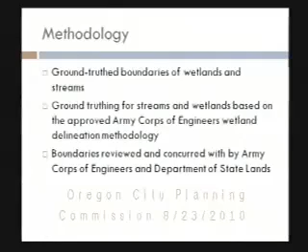The boundaries for wetlands, streams, and ponds were then flagged by wetland scientists in the field, and then surveyed by professional land surveyors to an accuracy of about one-tenth of a foot.

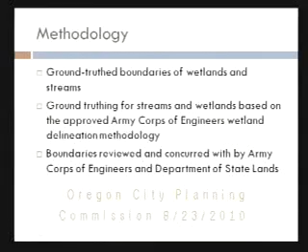We then prepared and submitted a wetland delineation to the Army Corps of Engineers and Department of State Lands, and we have since received jurisdictional determination and a letter of concurrence on the location of the wetland, stream, and pond boundaries from both agencies.

After the fieldwork was conducted, we applied Municipal Code 17-49-110, shown in this slide, to each wetland, stream, and pond to determine the width of each NROD buffer.

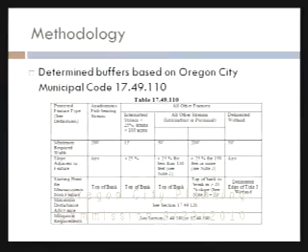It's my understanding that the city has taken a cost-effective, conservative approach to mapping all of the NROD boundaries throughout the entire city. As we were working with a relatively small area, we were able to refine the buffer locations based on the ground truthing fieldwork.

During the ground truthing fieldwork, we encountered several roadside runoff ditches within the project footprint that were created for the purposes of conveying stormwater during precipitation events. During our mapping process, we realized that these roadside runoff ditches had been provided NROD buffers in the city's mapping.

Oregon City Municipal Code 17-49-20 states that NROD protects, as one connected system, the habitats and associated functions of the streams, riparian corridors, wetlands, and regulated upland habitats found in Oregon City. Our interpretation of the code does not include stormwater drainage ditches. This is supported by Clean Water Services' definition of a water quality sensitive feature, which specifically excludes stormwater ditches.

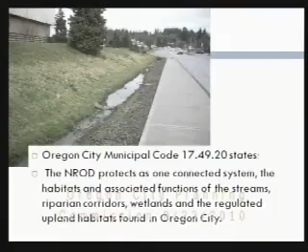After we determined the NROD buffer widths, we overlaid the project's disturbance footprint to determine the project's NROD impacts, as shown in this table. All NROD impacts would be permanent, meaning the impacts would permanently remove vegetation within the NROD boundary. The next several slides give you a better idea of the quality of NROD buffers that would be impacted by the proposed project.

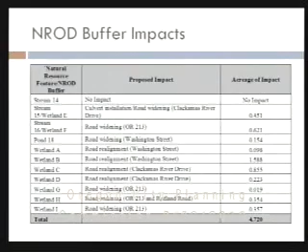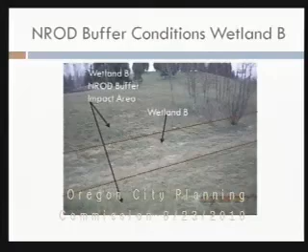This photo shows Wetland B in the center with the NROD buffer on either side. The Welcome to Oregon City sign and Washington Street are behind the photographer, and Highway 213 is almost visible in the upper right-hand corner. The NROD buffer is located within a mowed, landscaped area planted with mostly non-native species. Proposed impacts to the Wetland B NROD buffer will be the largest within the project footprint, encompassing about 1.5 acres.

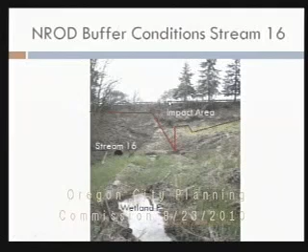Stream 16, Wetland F, and their NROD buffers are shown in this photo. Highway 213 is located at the top of the slope. The red line in the photo shows the approximate location of the impact limits, and as you can see, the project impacts will occur within the road fill slope and will constitute very narrow impacts.

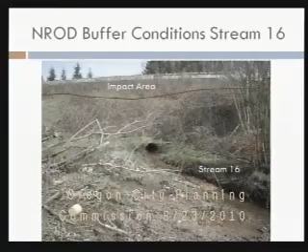This is the same stream on the west side of Highway 213. The red line again indicates the approximate impact area limits and shows additional narrow impacts within a highly disturbed vegetation community. Finally, this is a photo of Stream 15 located immediately east of Clackamas River Drive. The red line again shows the approximate impact limits. The NROD buffer surrounding the stream is dominated by Himalayan blackberry and is again highly disturbed.

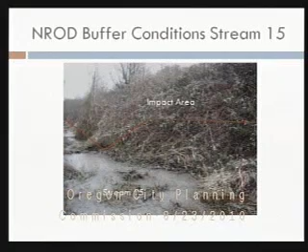Due to the heavily degraded condition of these NROD buffers, mitigation based on providing much higher quality functions and values at a ratio of 1:1 is proposed.

From the start of the project, the Public Works Department and consultant team have made every effort to meet the intent of the city's NROD and NROD mitigation code. To this end, the mitigation site has been designed to address functional values B and C from Municipal Code 1749-10, which concentrate on protecting, restoring, and enhancing floodplains, upland, and riparian habitats.

One way we intend to meet these goals is through appropriate mitigation site selection. In this slide, you can see Highway 213, Washington Street, and the mitigation site located between Interstate 205 and the Union Pacific Railroad tracks. One of our goals is to keep the NROD mitigation as close to the impacts as possible, so the mitigation site is proposed approximately 225 feet north of the proposed project.

This photo shows the mitigation site in its current condition. Interstate 205 is at the photographer's back, and the Union Pacific Railroad tracks are in the background. The proposed mitigation site is located within a heavily degraded area, dominated mainly by noxious weeds including Himalayan blackberry and Scotch broom. The site is located on a former log mill deck that has 10 to 15 feet of wood chip debris at the top of the soil profile. Due to the degraded condition of the site, there's a great deal of enhancement opportunity here.

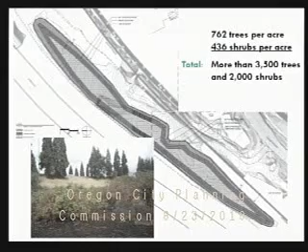One of the most important ways we're planning to ensure that the NROD functions and values will be replaced and that the mitigation site will be successful is through a thorough monitoring plan and use of appropriate success criteria. Five years of vegetation monitoring will be conducted to ensure at least 80% survival of trees and shrubs and no more than 10% cover of noxious weeds throughout the mitigation site.

Finally, we plan to ensure success by providing irrigation throughout the site and at least 5 years of maintenance to ensure plant establishment.

The goal of the NROD mitigation site is to provide much higher quality functions and values than what is impacted within the NROD buffers. Overall, we are proposing to provide mitigation based on habitat quality that is designed to improve water quality by providing shade and vegetation structure to remove sediment and slow water flow. The mitigation site will also improve wildlife habitat through native species planting and noxious weed removal.

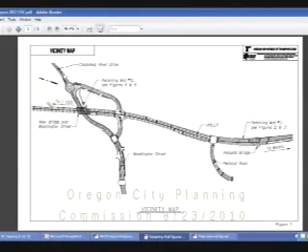The other wall is to the north of the existing Stein Oil, below the Stein Oil site, and it'll be used to create a portion where the new Washington Street alignment is going to be. This is retaining wall number 1.

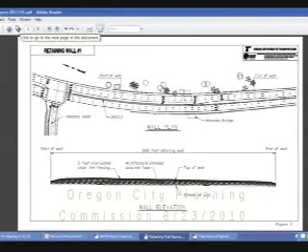I can actually go through my notes and just use these diagrams. Retaining wall number 1 is 808 feet long. It's fairly significant in length, and the height ranges from 2 to 18 feet, with an average height of 13 feet.

You can imagine what this is going to look like along Highway 213, typical of highway construction. This gives you an idea of what it would look like to the driver. Keep in mind that this area is fairly vast, because Highway 213 has a very wide cross-section, and there's quite a bit of geography around this area.

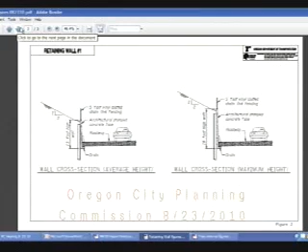There's a lot of topographical changes. So in some ways it's going to be a massive wall, but in many ways it's going to kind of be dwarfed by the overall expanse of the area.

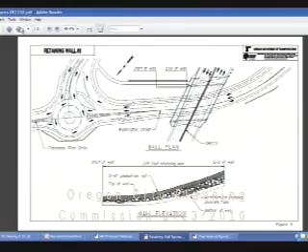Retaining wall number 2 is quite a bit smaller. It's 109 feet long, with a height of 2 to 7 feet. But it's going to sit on top of an 18-foot high slope. So what we're trying to do is balance the height of the wall and the height of the slope and make them fit so we can fit Washington Street in between it and the Union Pacific Railroad tracks.

Let me go back to the first retaining wall. I'm going to now go back to this slide. Oh wait, one more on this.

This is actually very helpful to show the cross-section of the car, the road, the slope, and then the wall. As you can see here, what we are introducing in this particular part of the project location is a new sidewalk connection, essentially between Clackamas River Drive and Highway 213. It'll be constructed on top of this wall.

On retaining wall number 1, we're asking for a 13-foot variance for the wall face. Wall faces in our code are intended not to exceed 5 feet in height, and everything's supposed to be terraced.

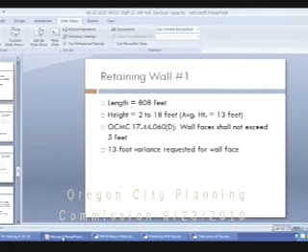And you can't terrace because of the right-of-way? Because it's too dominant a right-of-way? We would need to get more right-of-way, but I'll explain why we're proposing not to terrace. Okay, I'll let you know that.

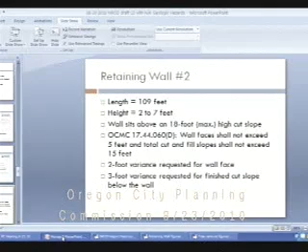On retaining wall number 2, we're asking for a 2-foot variance on the wall face because it is up to 7 feet high. And because we have an 18-foot high cut slope, the code only allows for 15-foot high cut slopes, we're asking for a 3-foot variance for the finished cut slope.

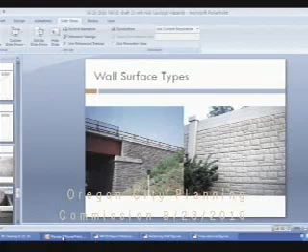One thing I wanted to mention is I brought some examples of wall surface types that are being used. You've probably seen the Highway 213 Beaver Creek Road intersection project. We were careful to select a retaining wall material, a concrete material that had an architectural face on it that wasn't just plain old concrete. I think that's really important to do, and that's what we're proposing on this project as well. Here's some other examples. I think the project team likes these better, and these are a little not quite as attractive in my opinion.

That lower picture is exactly what I was concerned about seeing. I was going to ask if it was like the one over by the metro or the train, which is what it looks like. So who controls the look? Is that Public Works or ODOT?

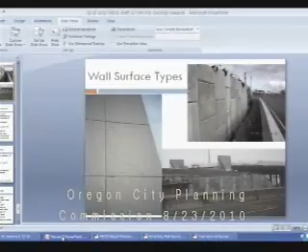It's actually the project team, which includes Public Works and ODOT. We also have public involvement pieces, so we have public meetings where we show the design and some wall types to make sure we don't get angry reactions. But we only have so many types we can practically use, and we have to keep things within budget. These are two examples of what's possible.

So there's a process for actually selecting it? Yeah, it's not a formal process where you go through an architectural review board, but the project team reviews them, costs them, and decides what we think would fit in well down there. Then we'll show it in the public involvement process. We won't have a committee selecting it though.

Do any of those styles have better acoustic attenuation than others—do some of these walls produce more noise or quiet noise less than others? I think concrete is pretty much concrete, but I'd want to ask one of the wall designers that question. It seems like they put lots of surface area onto the wall to buffer the sounds. I'm not an acoustic expert, but we could come back and fill you in on that information.

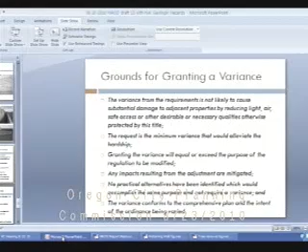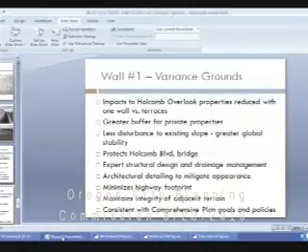So number one, what I've tried to do here is summarize, because we have a limited presentation time length, for the variance for wall number one: we're asking for a 13-foot variance from the 5 feet because it goes up to 18 feet. One thing I want to point out is the entire wall isn't 18 feet tall, as you can see—it kind of goes up and down. But the maximum height is still 18 feet, so we're asking for a 13-foot variance.

In addressing all the grounds for variance, we concluded that by doing one retaining wall, we don't have to go nearly as far back into the slope that's below the homes up on the Holcomb Overlook. We felt that was really important because the more you cut in over there to get those terraces, the more it opens up the sound, and it also really shrinks the buffer between the road and the edge of the infrastructure with the properties up above.

The other thing that's important to me, especially on the geologic hazard side, is that the more we cut into that slope, the more we're disturbing the general stability of the whole slope there. I'm concerned that if we kept cutting back and going up the slope, we could impact global stability in that area.

The other benefit of having just one retaining wall is that it protects the Holcomb Overlook, or Holcomb Overcrossing—the bridge that's there—because it goes along the edge of that bridge abutment. If we had to terrace back, that whole excavation would be impacting the Holcomb Bridge. There's also part of the code about making sure it's done right.

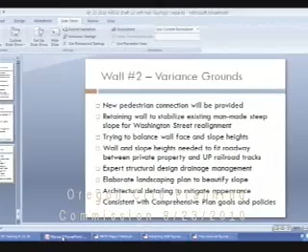You wanted me to mention the Metro site. We worked with Metro because we had to acquire some right-of-way from them. They do not have any plans to move from that site today, but they do foresee in the long term that they will be finding another location. It's difficult to find a location for a transfer station, and they've invested a lot of money into that site so it works as a regional facility. They provide service for many, many people. For now, they're planning to stay, though they're also looking around and wondering how they're going to manage solid waste as time goes on. They're looking at a few different changes in the solid waste industry, so they have no firm plans to move at this time.

It would be interesting in the long-term plan to know how to mitigate that area, because if it becomes retail, for instance, how is that going to affect what we're doing today with the riparian behind it? That's something to think about long-term, and since we don't have a master plan with them, it's hard to know, but it's top of my mind when I'm looking at it.

We have considered traffic even if the site redeveloped in the design, and we are also working with Metro on making some improvements to the pond that's out there, the Metro pond. A lot of people don't even know it's there, but when you get there, it's just a fabulous pond. From what I understand, it has this incredible diversity in plant species and trees and places that birds love and all this stuff. It's supposed to be that way, and it is that way.

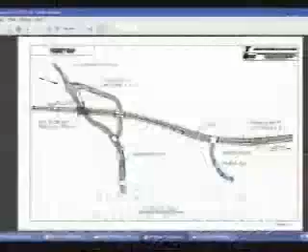The question I have is, in most applications where we find massing, large walls and even on buildings, we generally try to get some sort of in-and-out type of deal. I don't know if your designer is here tonight, but I'd be interested to see if there's a way, rather than just have this massive wall—I'm only looking at pictures so it's hard to say—but all I can see is this wall along 205 down by Powell and Division, those big, huge, 40-foot walls. That's all I can envision, and I'm wondering if you could set something back every so far to give it a little different texture.

I'm not sure what it is. I mean, I like the design because it's not a big square wall. It actually looks like it's got some flow to it, and it follows the land. I just wonder if you could do something with articulation, maybe something like a wave.

Well, I'm not sure how much actual in and out articulation we could do, but I think what we might be able to do is try to find some complementary finishes, or try to do something to break up the wall, maybe with texture, making sure it doesn't become a hodgepodge mess, but maybe more with vertical elements amongst the blocking or something like that.

We do a lot of that. I've noticed it down in Arizona, in a lot of these things they've done it with art, beautiful work. You can look at a 12-foot wall and it looks like a 12-foot art piece. I'm not sure how you'd do that here in the Northwest, they can't do it with Southwestern art, but something along those lines where they do a color change every so often. I don't know, but to me that massing would be almost too much.